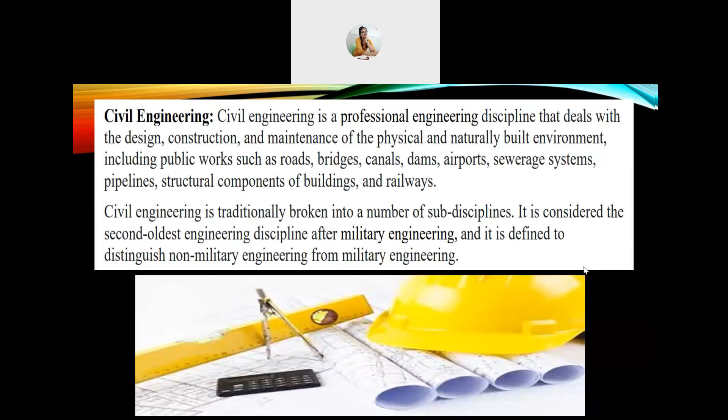History of civil engineering: in the 18th century, the term civil engineering was coined. And the first self-proclaimed civil engineer was John Smeaton. You have to remember this name, John Smeaton.

He constructed the Eddystone Lighthouse, and in 1771, Smeaton and some of his colleagues formed the Smeatonian Society of Civil Engineers. This society was a group of leaders of the same profession, that is, civil engineers.

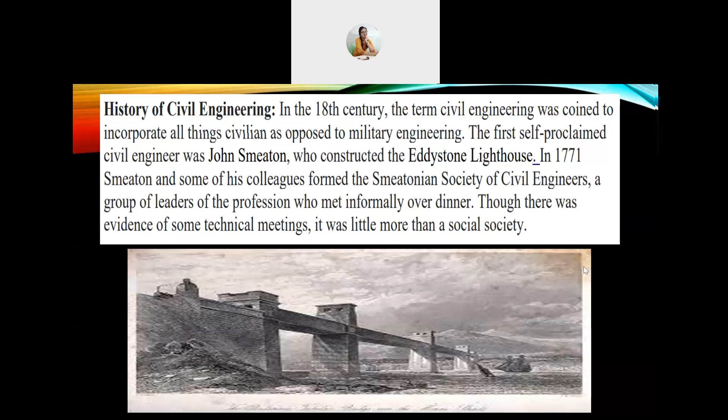They formed the society by meeting informally over a casual dinner, and there and then they decided to form this society, the Smeatonian Society of Civil Engineers. Though there was some evidence of technical meetings of the society, that information is very limited.

Next, in 1818, the Institution of Civil Engineers was founded in London, and in 1820, the eminent engineer Thomas Telford, remember this name, became its first president.

The institution then received a royal charter in 1828, formally recognizing civil engineering as a profession. So the charter definition for civil engineering is mentioned below.

This definition is very important, and you have to write it exactly the same way because it is a chartered, coined definition, and you can't change its words or the placement of the words.

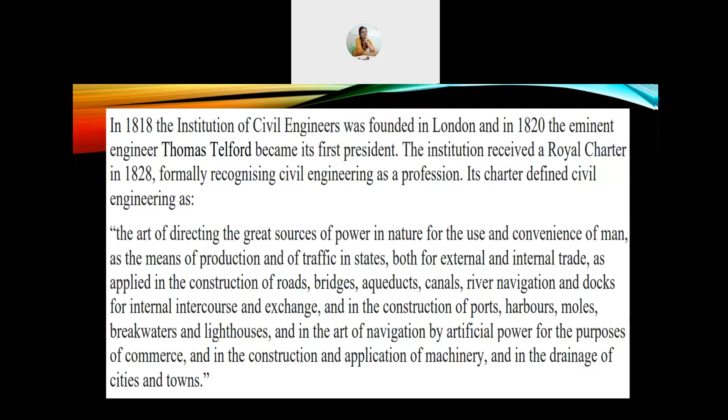The definition is: the art of directing the great sources of power in nature for the use and convenience of man, as the means of production and of traffic in states, both for external and internal trade, as applied in the construction of roads, bridges, aqueducts, canals, river navigation and docks for internal intercourse and exchange, and in the construction of ports, harbors, moles, breakwaters and lighthouses also, and also in the art of navigation by artificial power for the purposes of commerce, and in the construction and application of machinery and in the drainage of cities and towns.

The next topic is recent breakthroughs in civil engineering and its innovation. The world's production industries have already generated tremendous amounts of economic growth, but industrialization of cities has also led to significant changes, including overcrowding and extreme pollution.

Urban environments are often home to many industrial facilities, and people come to the city seeking employment, but large metropolitan hubs are running out of space to house their residents. With overcrowding, resource demands are also increased, and as cities grow, urban environments may face more pressure in their attempts to provide large urban populations with sustainable, supportive infrastructure.

So what is sustainable supportive infrastructure? This includes food, water and safe roads. Advanced civil engineers are needed now more than ever to provide solutions to these critical issues.

Civil engineers use innovation to improve building materials and construction methods. This is the main and basic role of any civil engineer. For example, engineers are creating technologies to give buildings healing abilities and skins. Engineers are also developing technologies that reduce the environmental load of the structure, which is important.

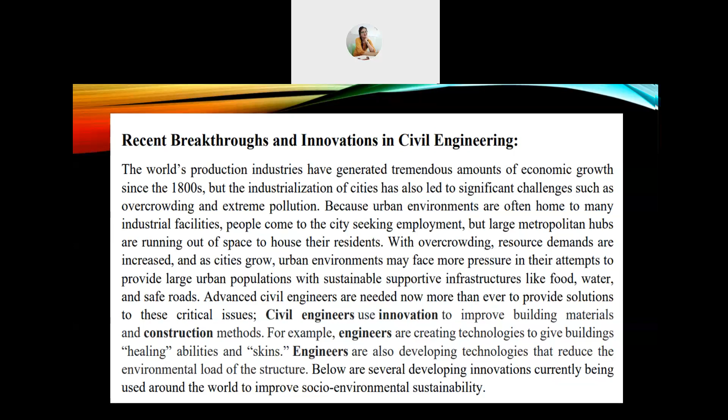The first one is plastic roads. Related to these innovations, there are five or six innovations in total. After this lecture, I'll be showing you short videos so that you can understand better about these innovations and their definitions.

So the first one is plastic roads. In response to massive generated local waste and plastic pollution, India's government began experimenting with plastic roads during the early 2000s. This happened with the help of waste plastic, which is being used as a construction material.

An early report of India's Central Pollution Control Board discovered that even after 4 years of use, the Jambulingam Street in Chennai, one of the first plastic roads in India, had not sustained much damage by using plastic waste. The board cited that no potholes, rutting, raveling or edge flaws were discovered during the inspection or evaluation.

This level of performance attracted local governments who were looking to get rid of Tamil Nadu's urban environments discarded shopping bags, foam packaging and other unrecyclable plastic products disposed in the streets. As of 2015, any Indian city with a population of at least 5 lakhs is required to construct their roads using waste plastic as the core material.

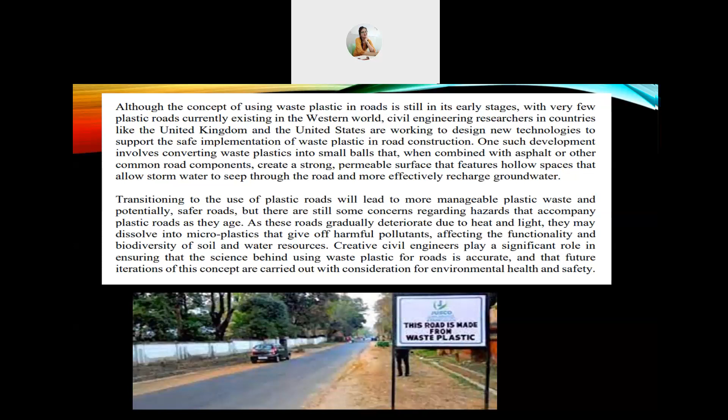But there are still some concerns regarding hazards that accompany plastic roads as they age. As these roads gradually deteriorate due to heat and light, they may dissolve into microplastics that give off harmful pollutants, which will affect the functionality and biodiversity of soil and water resources. Creative civil engineers play a significant role in ensuring the science behind using waste plastic for roads is accurate, and that future iterations of this concept are carried out with consideration for environmental health and safety.

The next innovation is green roof systems. The Environmental Protection Agency, EPA, defines a green roof as a vegetative layer grown on a rooftop. Today, green roof systems have become popular all over the world, not only for their beauty but also for the benefits they provide towards environmental sustainability.

Germany is currently leading the world in green roof technologies, having implemented green roofing systems on approximately 10% of German homes since the technology emerged in the early 1970s. Civil engineers are responsible for ensuring that green roof supportive infrastructure, such as a comprehensive watering system, is engineered to consistently deliver an appropriate amount of resources, and the roof itself must be designed to effectively provide improvements to environmental sustainability. Civil engineers still face obstacles when planning the installation and maintenance of green roof systems, like high cost and harsh climates, but innovations in modern engineering techniques have allowed the industry to consistently offer environmental benefits to urban communities.

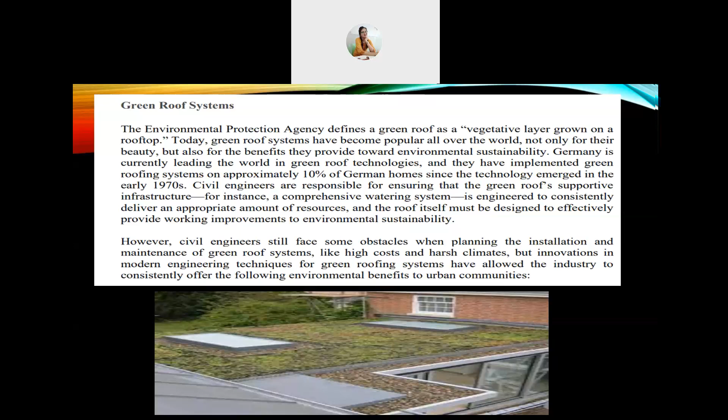The environmental benefits that urban communities get from using green roof systems are mentioned here in four points, which are important to remember. The first is enhanced urban biodiversity. Green roof systems accommodate new flora which may act as new habitats for different species of plants and animals.

Number two, cooling of buildings. The vegetation on the roof acts as thermal insulation, storing excess heat and decreasing peak temperatures within the building. This means less energy must be consumed to heat the building, resulting in decreased energy cost and lower pollutant emissions.

Number three, reduce runoff quantity. On average, a green roof retains 40 to 60% of total rainfall. Storing this rainwater as it falls has been shown to result in runoff reduction of 34% between September and February and 67% between March and August. By reducing runoff, civil engineers that design green roof systems can limit strain on sewage systems and lessen the cost of roof damage.

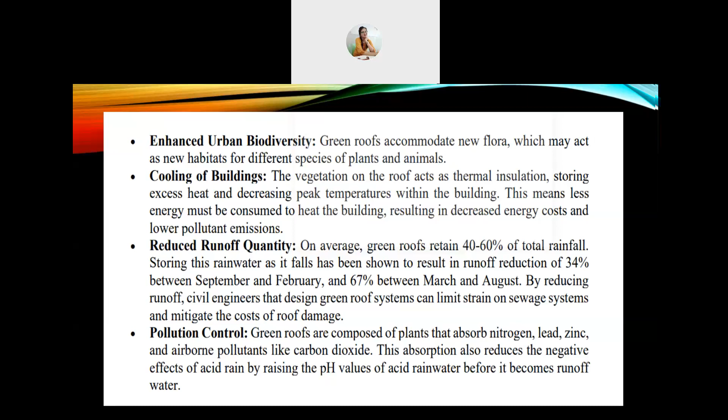The last one, pollution control. Green roofs are composed of plants that absorb nitrogen, lead, zinc, and airborne pollutants like carbon dioxide. This absorption also reduces the negative effects of acid rain by raising the pH values of acid rainwater before it becomes runoff water.

Next, eco-floating homes.

Affordable housing and overcrowding in cities are putting much pressure on urban populations, as I have mentioned earlier. So to combat these issues of overcrowding, civil engineers are designing floating homes, practical living spaces that sit upon the water, or rather float upon the water.

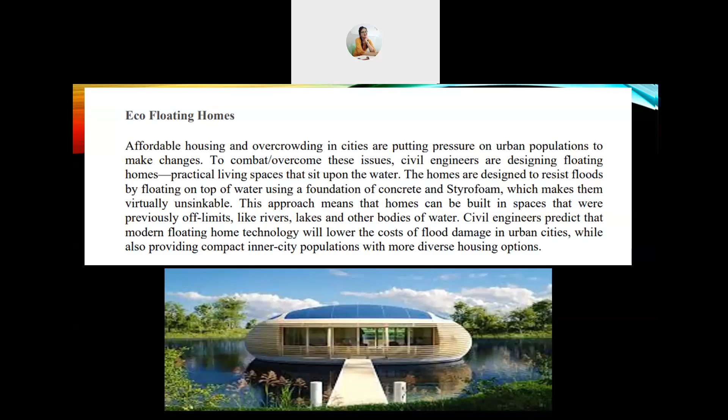The homes are designed to resist floods by floating on top of water using a foundation of concrete and styrofoam, which makes them virtually unsinkable. This approach means homes can be built in spaces previously off limits, like rivers, lakes, and other water bodies. Civil engineers predict that modern floating home technology will lower the cost of flood damage in urban cities while providing compact inner city populations with more diverse housing options.

Next, vertical farming. Using multi-story high-rises to grow food is known as vertical farming. The Association for Vertical Farming has found that when compared with traditional agricultural methods, growing food indoors uses 98% less water and 70% less fertilizer on average.

To generate the amount of light and water necessary to keep plants healthy, while remaining as cost effective as possible, vertical farmers use a combination of energy efficient LED lights and hydroponic technology. We'll study LED lights in our upcoming lectures.

Hydroponic technology includes plumbing, irrigation, and filtration. By implementing modern automation techniques to regulate these systems in vertical farming, civil engineers can also limit the cost of labor required to maintain these farms. The costs associated with vertical farming are still quite high, but as science in this field advances, civil engineers will be able to provide populations of unfarmable regions with opportunities to grow their own produce.

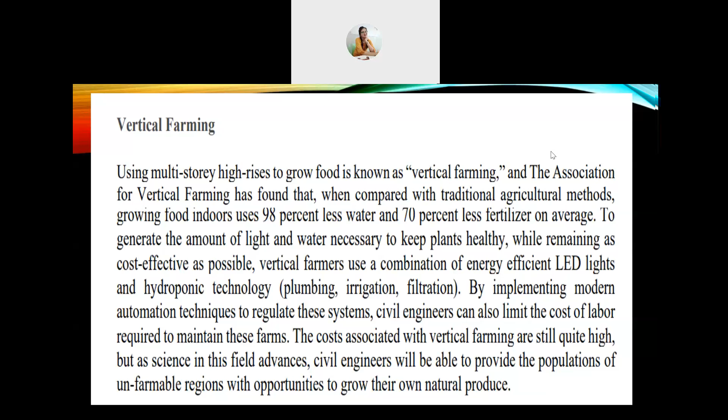Many entrepreneurs and scientists are currently evaluating how growing food inside a building coincides with improving social and environmental sustainability - how it helps the population socially and environmentally. Vertical farms also have higher yields than traditional farms, allowing production of more food using far less urban space.

Significant progress in the study of vertical farming could lead to improved food diversity, especially for residents of population dense urban areas, and in places normally unable to grow produce using traditional methods.

The last one is rainwater harvesting. Harvesting rainwater is a climate adaptation strategy that has been used in ancient and modern societies. The antiquated rainwater harvesting techniques of the past were attempts to cope with severe climate conditions by storing water as it fell, allowing populations to drink the water or prevent oversaturation of the land during extreme precipitation. Modern rainwater harvesting is fundamentally the same in theory, but advancements in science and engineering have introduced sophisticated filtration and rain capturing technologies that boost the efficiency of the process.

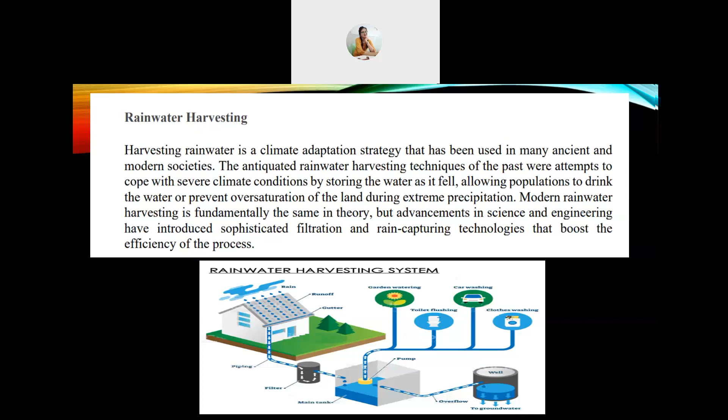Dutch engineers and researchers are using effective large-scale implementation of rainwater harvesting infrastructure, which reduces stormwater runoff by 20 to 50%, by mitigating the strain that excess storm precipitation usually places on sewers and drainage systems.

This is made possible by mounting rainwater catchment devices on the roofs of buildings, then routing the collected rainwater through a treatment system and finally into the storage tank. In order to ensure the effectiveness of this rainwater harvesting, the contents of each storage tank must be depleted before significant rainfall events occur.

Therefore, civil engineers must obtain the knowledge and necessary experience to analyze the precipitation patterns and water usage rates of a region before installing any rainwater harvesting systems.

With cost-effective approaches to the catchment, storage, and filtration technology used in rainwater harvesting currently being implemented and improved, larger scale rainwater collection is poised to become a widely used, economically viable solution to urban potable water shortages and stormwater management. Large cities have many social benefits, but there will always be disadvantages to having large populations restricted to a finite amount of space.

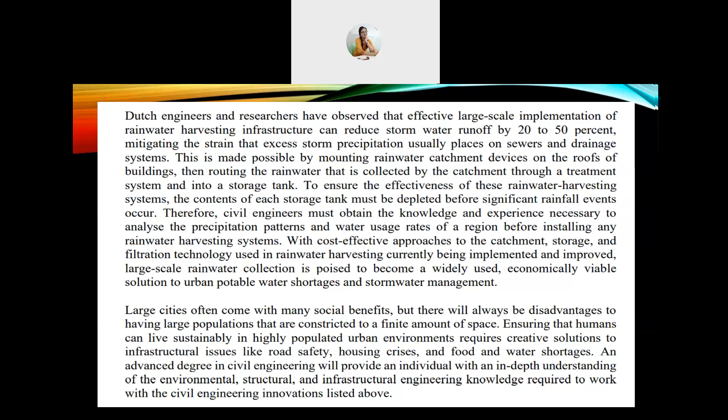Ensuring that humans can live sustainably in highly populated urban environments requires creative solutions to infrastructural issues like road safety, housing crisis, and food and water shortages. An advanced degree in civil engineering will provide an individual with an in-depth understanding of the environmental, structural, and infrastructural engineering knowledge required to work with the civil engineering innovations stated above.

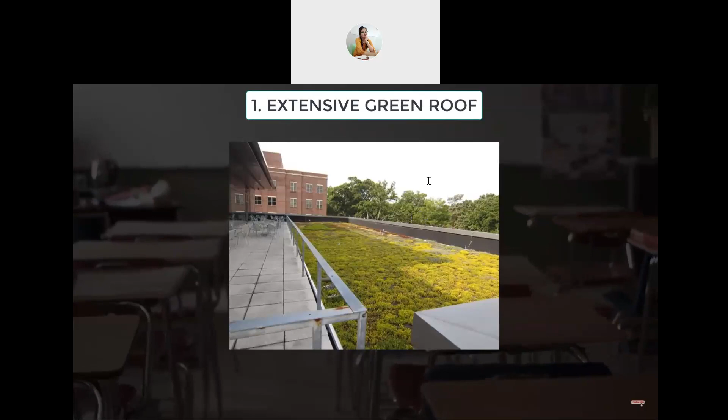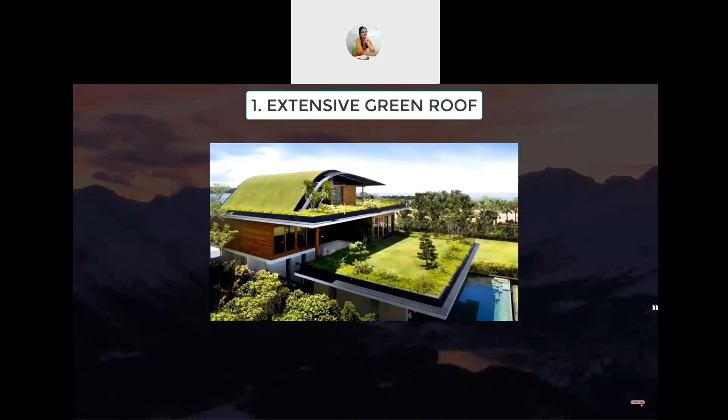Although there are no precise definitions of them, an extensive green roof has a shallow growing medium, usually less than 6 inches, with a modest roof load, limited plant diversity, minimal water requirements, and is often not accessible. Intensive green roofs have more soil and a deeper growing medium, sometimes several feet, that can support more diverse plant selections, including small trees. They have more substantial structural loads and need more frequent maintenance and watering, and are usually accessible.

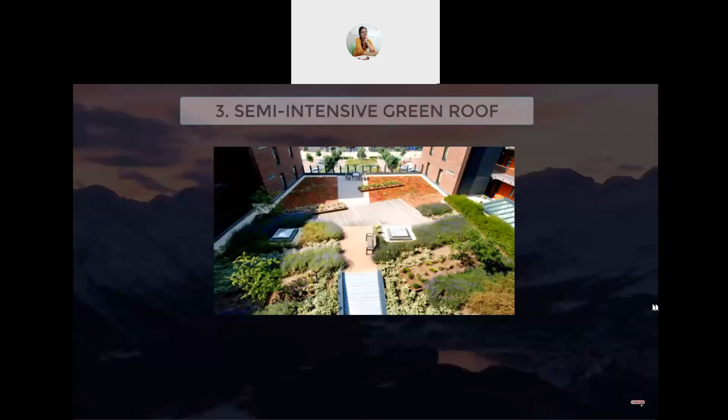Semi-intensive green roofs include features of both types. The appropriate depth of any green roof depends on the roof structure, the plants chosen, annual rainfall, and stormwater performance requirements. There is also another type of green roof, the modular green roof.

Some green roofs are installed in one large integrated section, while modular green roofs use portable planting beds placed together to create a large green roof. The modular units are often plastic or metal trays filled with growing medium. Modular green roofs can be installed incrementally and easily removed for maintenance and inspection of the roof layers underneath. One drawback, however, is that moisture cannot flow between units, increasing the impacts of wet and dry spells on the plants.

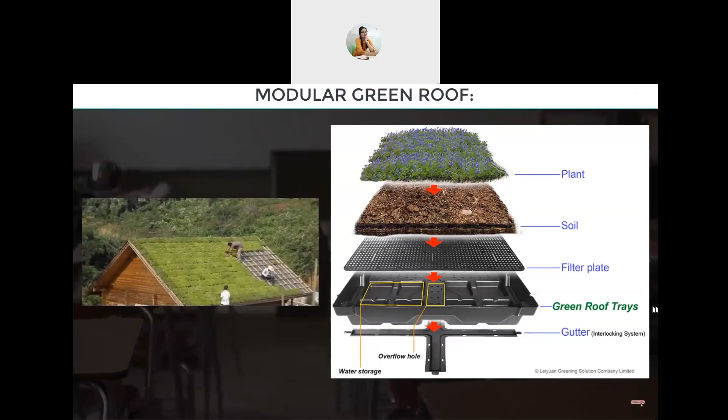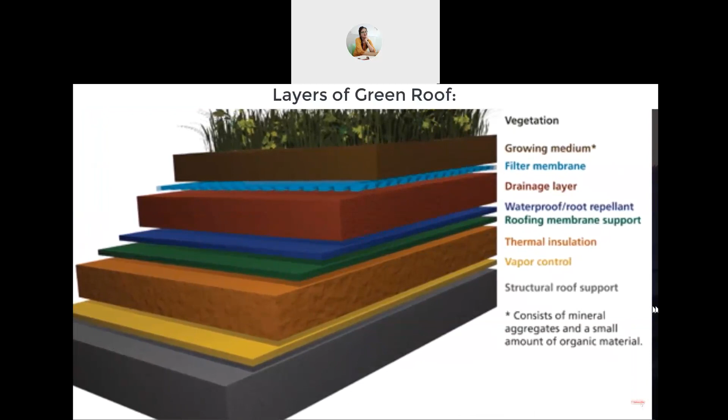Next, we talk about the layers of a green roof. All three types of roofs require specific layers of roofing material not found on regular roofs. The basic anatomy of a green roof consists of vegetation, growing medium, filter membrane, drainage layer, waterproof or root repellent layer, roofing membrane, support for planting above, thermal insulation, vapor control layer, and structural roof support. Each of these layers performs a specific function to keep the plants alive and protect the structure beneath.

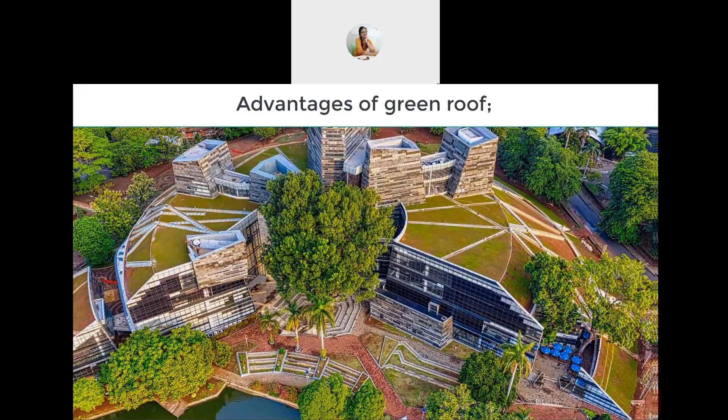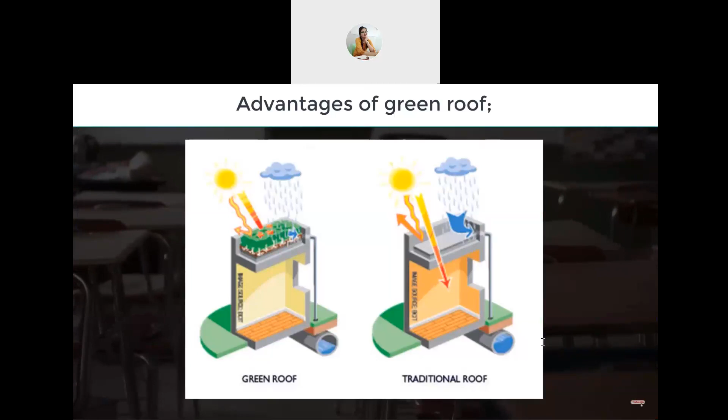So we discussed the definition, types, and layers of the green roof. Now we talk about advantages and disadvantages. First, advantages: these improve the drainage system and increase the lifespan of the roof. Green roofs boost thermal performance and help the environment in many ways. They also support wildlife habitats and increase air quality.

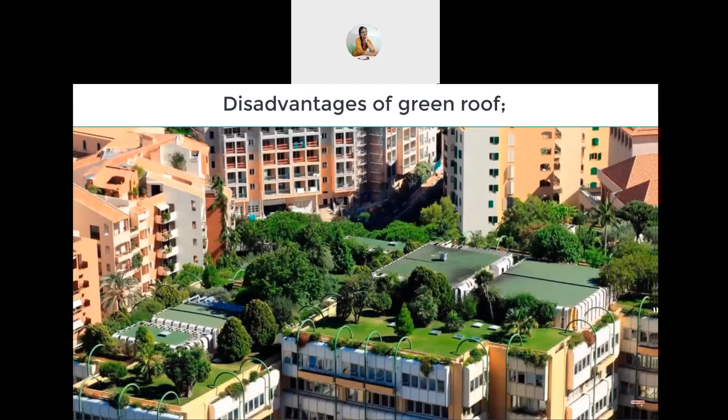The main disadvantage of green roofs is that they are more expensive than traditional roofs, but worthwhile in the long term because they save energy and help the environment. The other disadvantage is that the dead load due to green roofs increases on the structure, and they require extra maintenance. These roofing systems are used in some countries, but in India they are very expensive. The government should give incentives to those who install these green roofs.

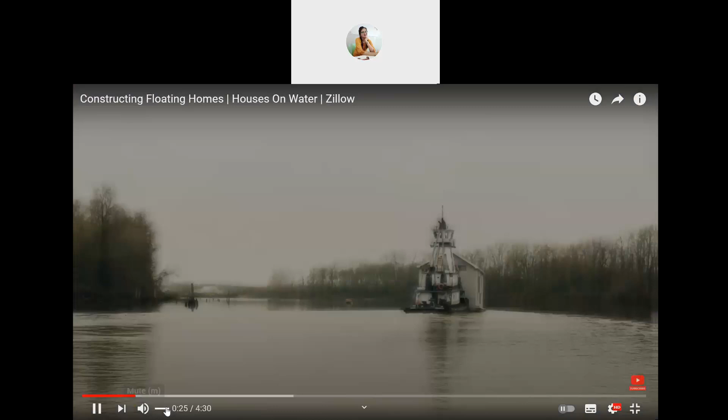I've grown up on the water. We've probably built, it's amazing, 50, 60 homes on the river. We build floating homes in Portland, Oregon.

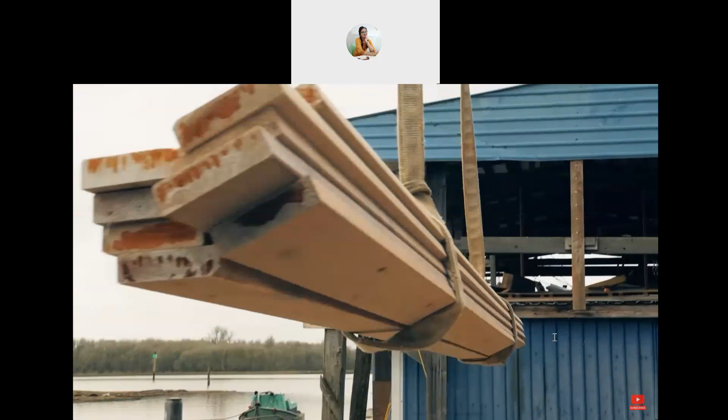My father got out of the Navy and decided to start building homes. And I was just at that age where I was a little too antsy to stay in college and decided to follow that path.

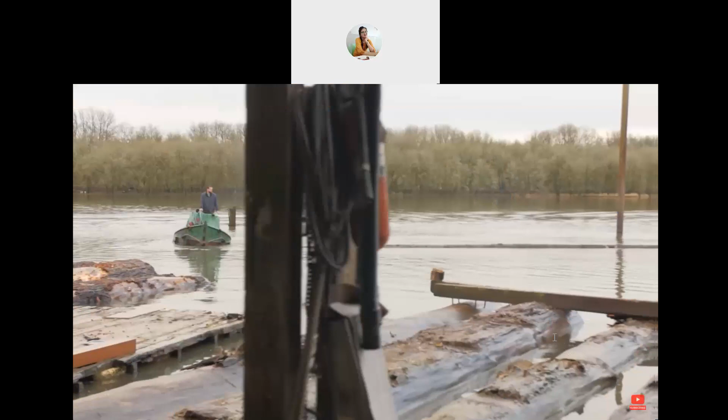We get a lot of calls from all over the country. There's not a lot of guys that do what we do. And believe me, I would love to do other areas, but this is where we have our facility, all of our guys. We don't travel.